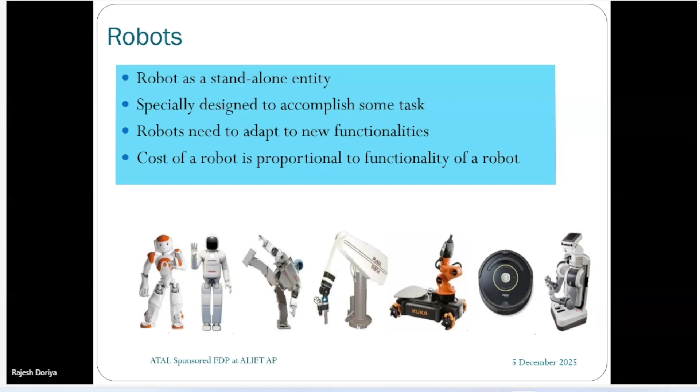If we trace the development of robots or robotics, we can see that it all started even before AI, and it has reported its development along the path of AI only. So the development reported in the field of robotics is very much similar. As we understand, whenever we talk about robotics, we are talking about AI only.

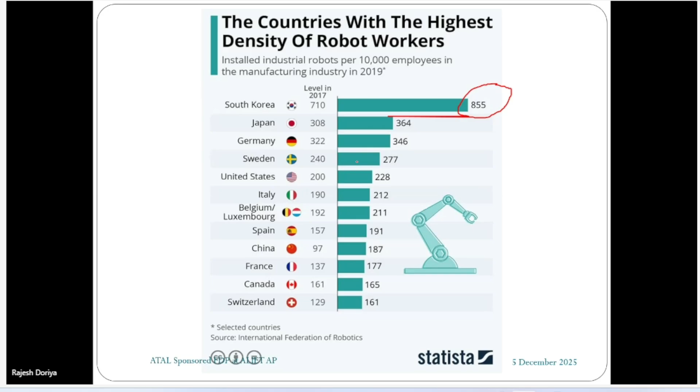Now, if we talk about the countries having the highest density of robot workers, in this graph we can see South Korea has the highest density of robot workers. Out of 10,000 employees, South Korea has around 855 robots. Japan is next, with 364 robots per 10,000 employees, followed by Germany, Sweden, US, and Italy. So that has been the trend in these countries.

Now, one more interesting study: how advanced robotics will impact the job market. This particular survey was done on a number of companies in a number of countries. As you can see in this plot, in China, around 67% of companies think that robotics are going to impact the job market.

5 to 10% of companies, this is the share where they are saying that around 20% of the job market will be impacted, and this is where they are saying more than 20% of the job market will be impacted. So in total, 67% of companies think they are going to get impacted by the introduction of robotics in the industry.

Here is India, where 41% of industry personnel think that with the rise of robotics, the job market is going to get affected. So by how much percent? This is the percentage: we can see around 10% and 11 to 20% have got an equal share, more or less.

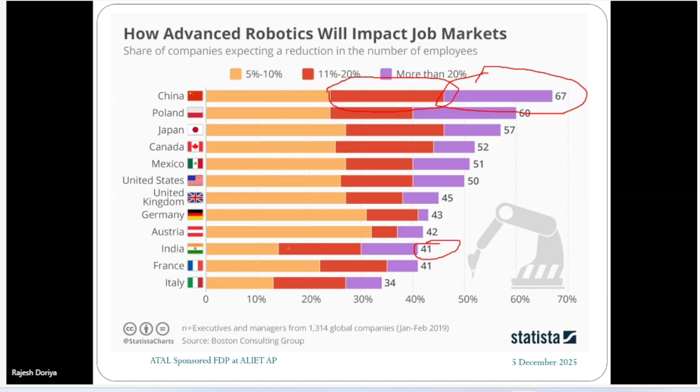Now, there are a few things whenever any development is done in the field of robotics. A robot must follow three laws: a robot may not injure a human being; a robot must obey orders; and a robot must protect its own existence when the first two are being followed. Whenever a robot is developed, these three laws of robotics must be followed. And these are the 4D environments in which robots are mostly used: dull environment, dangerous environment, dirty, and dear.

Dull means where some repeated task is being done, so with time it becomes dull. Dangerous, for example, in some nuclear facility, one has to operate certain things or do some jobs. So those things are going to be called dangerous jobs.

Dirty, for example, sewage cleaning and other things, so those are classified as dirty. Dear, where some sort of money is going to be made. These are the broad classifications of the environments in which robots are used, and these are the 4A tasks performed by robots: assistance, autonomous, automation, augmentation. With robot assistance is provided, then they're used for autonomous purposes, for example in space. Automation is done as we've seen in industrial cases. Augmentation, for example, where limb replacement is done—these are examples of augmentation where along with robots, people are doing their work.

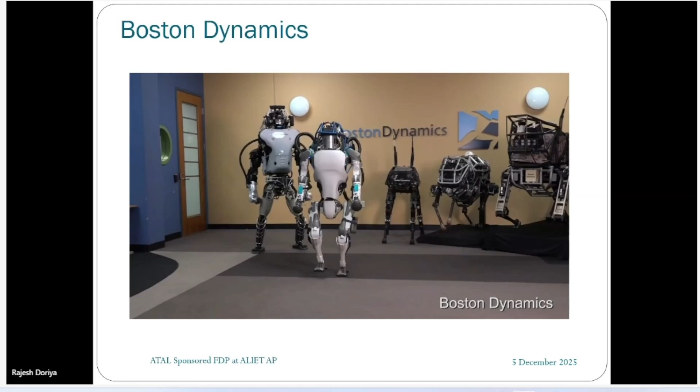Let me show you a video which will give you an idea of the developments being done in Boston Dynamics. Please let me know if you can hear the audio or see the video. Can you confirm audio and video are available, participants? Audio I could not hear, sir, but video is good. Now it's better.

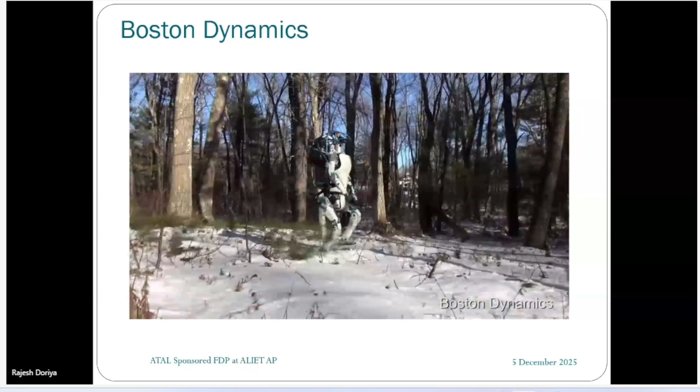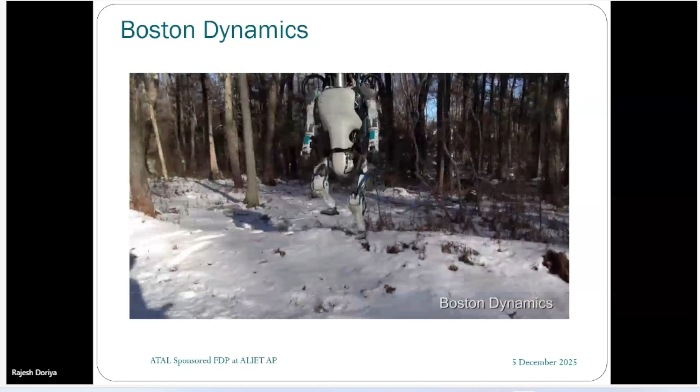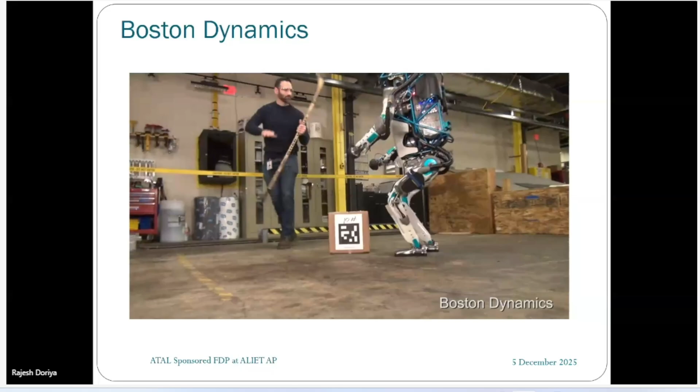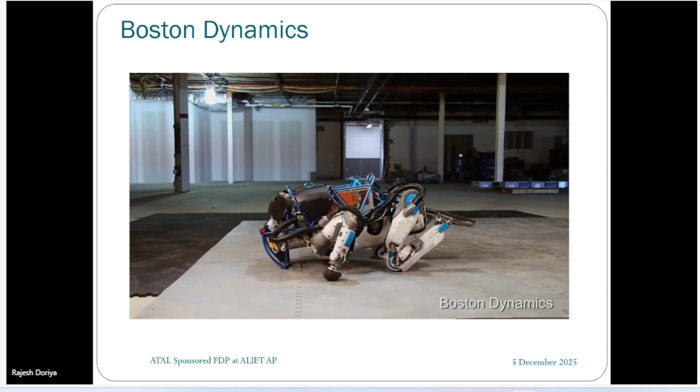So this is one development, and the other one is the nanobot. These are very tiny robots which swim in our bloodstream and do the designated job. They can have a micro camera and a payload, and with the help of this payload we can deliver a drug to a specific part in a controlled quantity, wherever it needs to be applied. So it can swim in our bloodstream, and there are many things which can be done. There are a variety of ways to power it—it can be with internal power sources or external power sources.

Now I guess I should play a video so that it gives you a better idea of how nanorobots are going to be used in the future.

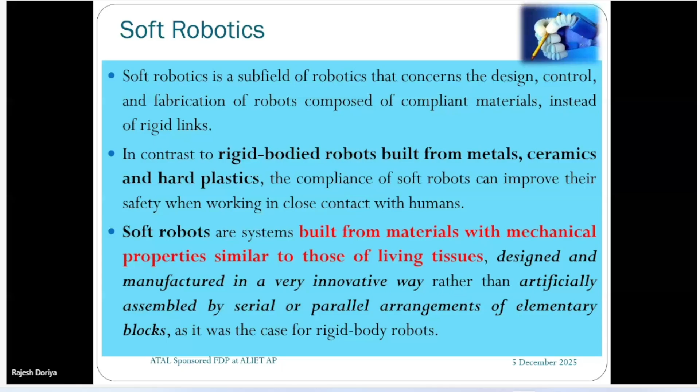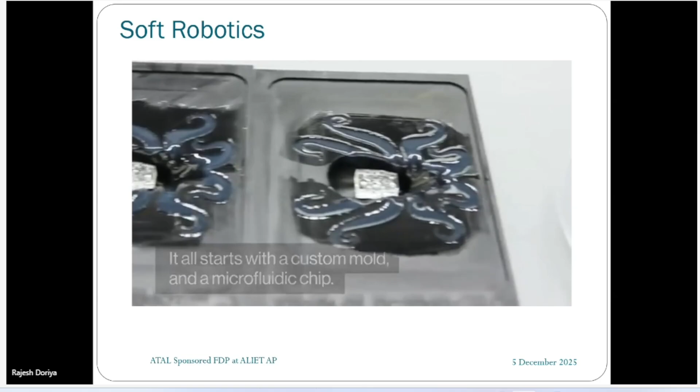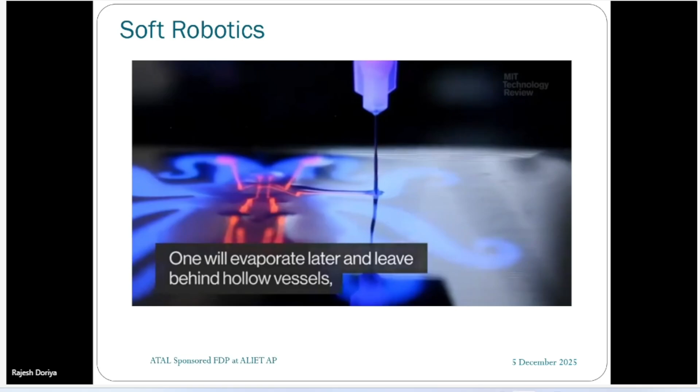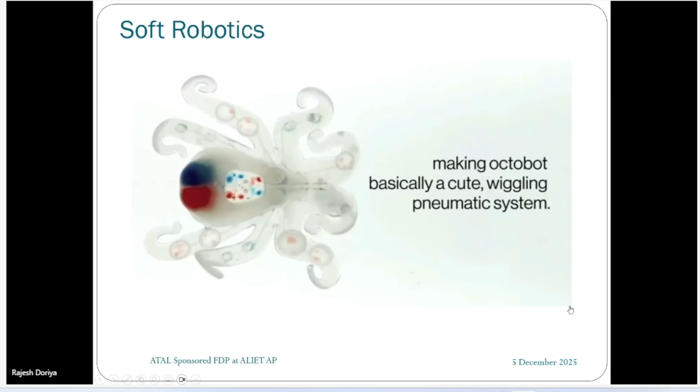So soft tentacles are going to be developed, and they are going to play a huge role in upcoming developments. In the field of soft robotics, the advancements are remarkable. We are not going to perceive robots the way we do nowadays — all those hard links and rigid parts are going to be gone.

So what happened when I went to Japan? I went to a number of shops, and whenever I went, a number of robots were greeting me. I did not need to go to a shopkeeper to ask about a product's specifications or its cost. Even if only a single shopkeeper is there and multiple customers are present, the shopkeeper won't be able to pay attention to all customers. So we tend to just move away from the shop because the shopkeeper is engaged with another customer and we're not able to find what we want. So to engage customers, these sorts of robots are there, and they are doing a great job.

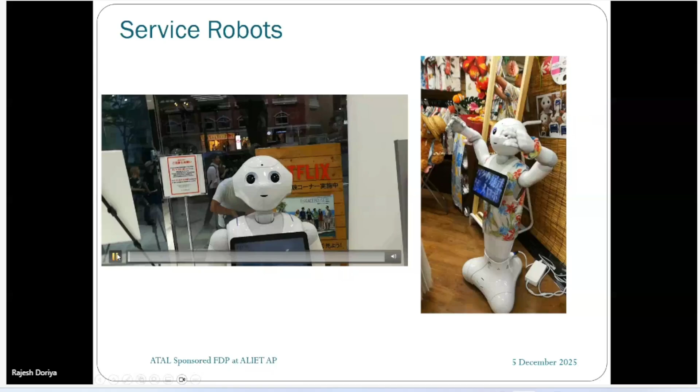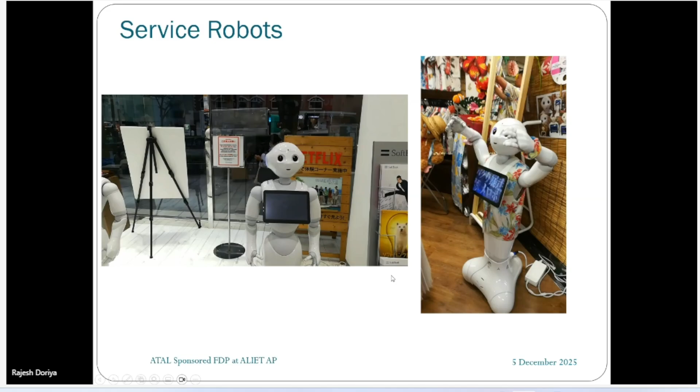Let me show you one such experience. In the shop, wherever I'm going, you can see these robots following me, trying to interact with me at the same time. So not even for a single moment did I have the impression that I wasn't being accompanied. This is another one where it is bringing in all the customers, letting the shop know what customers are present, and introducing everyone in the shop. This was a video taken eight years back.

Now I'm going to try to have an interaction with this robot. Just try to see the emotion and the gesture this particular robot is showcasing. Although this robot only understood Japanese, I tried my level best to interact with it in English — just observe the emotions and gestures shown by this robot.

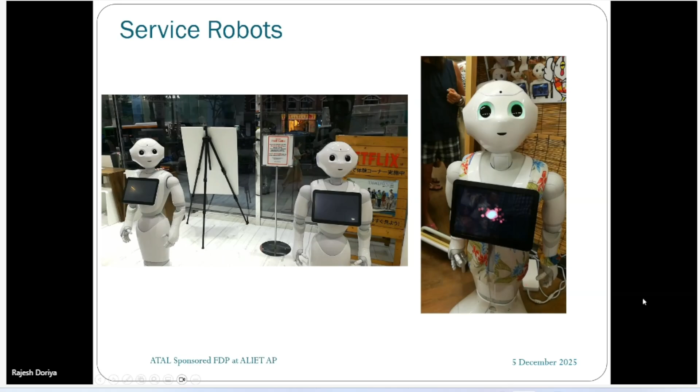It's getting quite awkward, you know. How? Then let it go. Arigato. Arigato. Arigato. You understand that? Arigato? Arigato.

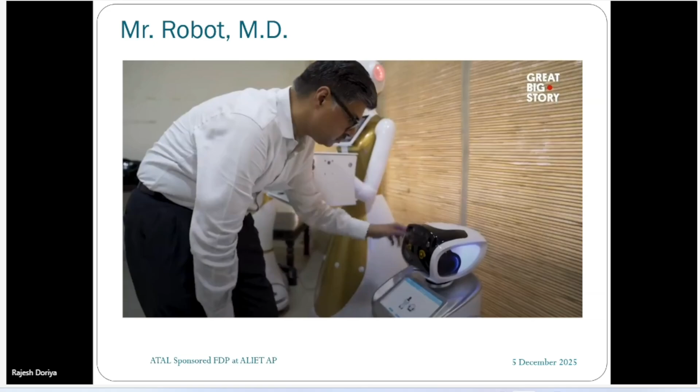There are various types of robots which can operate in a hospital. For the patient, it is like talking to a doctor face to face. I am Rajiv Karwal, chairman of Milagro Robots. Can I also introduce myself? Of course, Elf. Hello, I am Milagro Robot Elf. Nice to meet you and hope we can be friends. This great big story was made possible by Accenture.

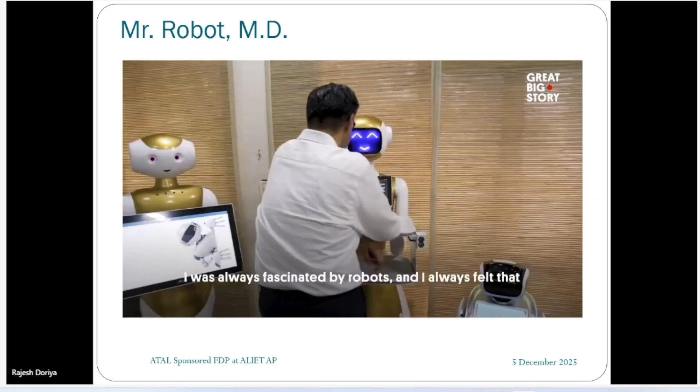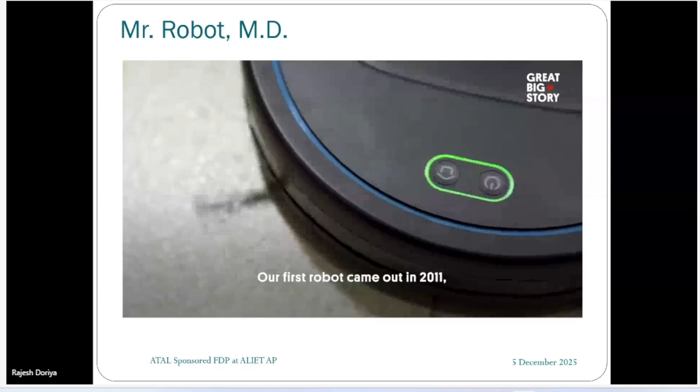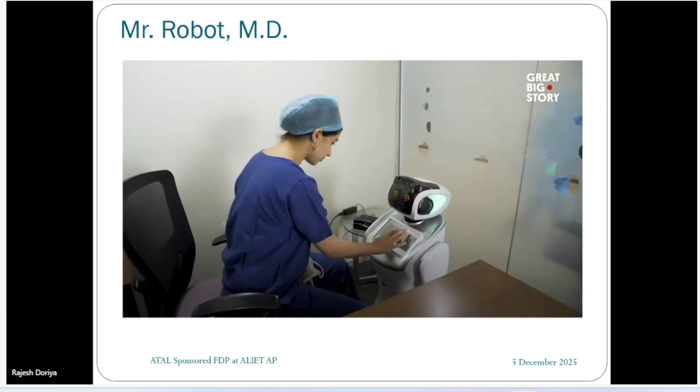I was always fascinated by robots, and I always felt that the next revolution amongst products would be in the robotic field. Our first robot came out in 2011, which was floor cleaning robots. Then we kept on adding many new categories of robots. The focus on the healthcare industry started when the coronavirus was spreading havoc around the globe. I was seeing a situation in Italy where almost 30% of the healthcare workers were getting affected. At that point in time, we thought we also have humanoids and they are probably acting as reception robots or concierge robots, but they can easily serve as a telepresence for the doctors.

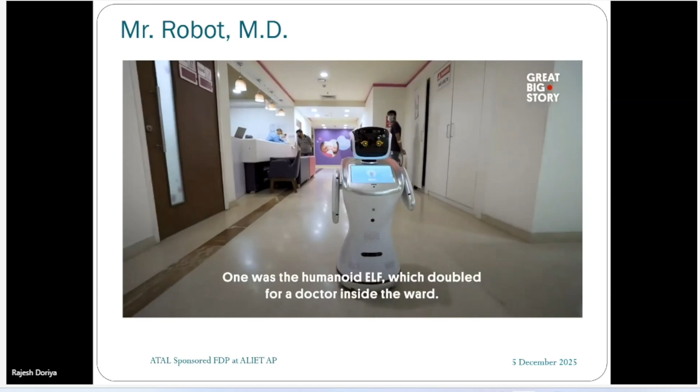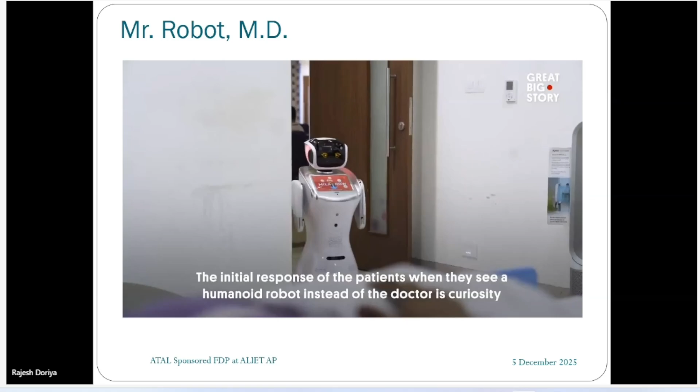We got a call from India's largest medical hospital and they said, can we do something together? We took our robots, took their feedback, and they selected two robots for their use. One was the humanoid Elf, which doubled for a doctor inside the ward, and also the floor cleaning robot, which killed the virus spores on the floor. The initial response of patients when they see a humanoid robot instead of the doctor is curiosity and maybe a little bit of doubt whether they would be satisfied.

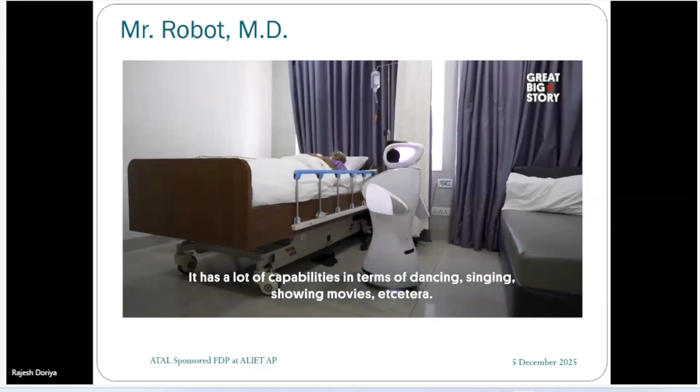And if there's anything, if you need any help or any questions, I'll be around, see you soon. Okay, thank you. The patient gets accustomed to it very, very quickly, and it's almost like face-to-face talking with a doctor. And also it is safe for the doctor, safe for the patient. Would you like me to dance? It has a lot of capabilities in terms of dancing, singing, showing movies, etc. So in that way, the patient remains connected, is in a good mood, and the robot keeps wandering around the ward.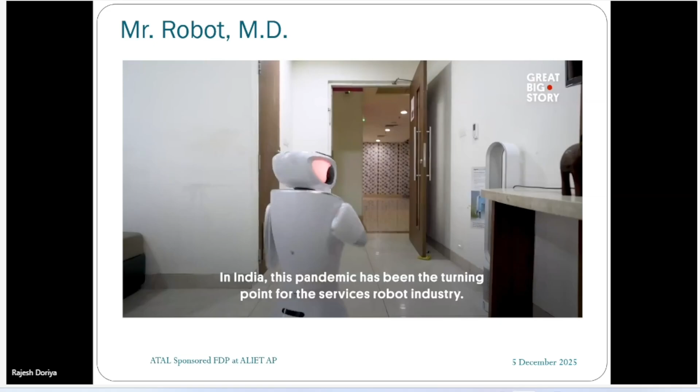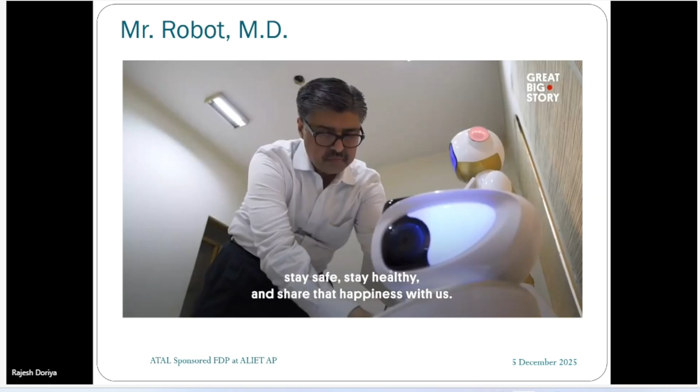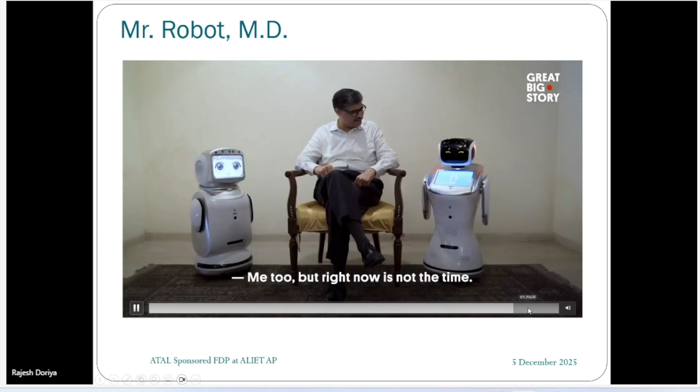I am your robo doctor. Take care, you will be well soon. Thank you. In India, this pandemic has been the turning point for the services robot industry. It really makes me happy when I see that our robots are helping people lead better lives, stay safe, stay healthy, and share that happiness with us. I don't have a favorite amongst my robots. They are all like my children, so it's very difficult. Am I not your favorite? Of course you are, of course. I love you. Me too, but right now is not the time. Would you like me to dance?

So I guess now you would have realized, and we have very strongly felt the need of this sort of solution or service robots in that Corona pandemic, right?

So thereafter, another major development which is being done in the field of robotics, or being reported in the field of robotics, is cloud robotics. So I would like to play this particular clip. This is a movie clip from the Matrix movie. I would like to ask all participants to watch this clip closely and let me know what exactly has been done in this clip.

Okay, so I request all participants to please pay attention and let me know what has just happened in this clip. Can any participant just tell me what exactly just happened in this clip? Any participant? Can you repeat? Yeah, please.

Please repeat the question. Okay, fine. A lot of noise is coming from the background.

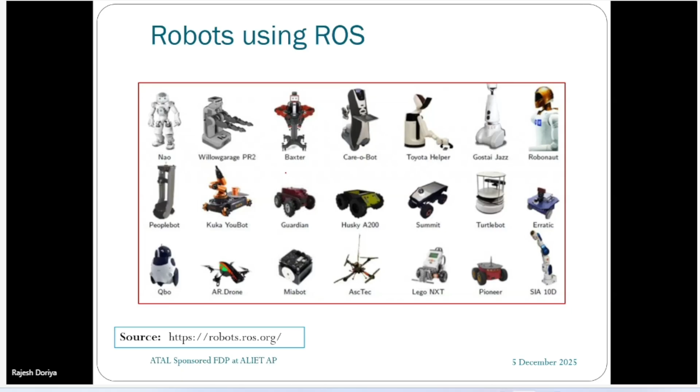Let me see whether videos are available, yes, one video is available. So you will get an idea about the capabilities which ROS offers. Let me play this one.

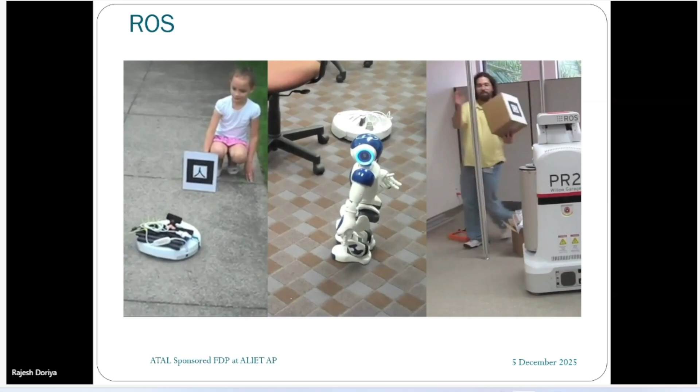So now I guess you would have got the idea about the capabilities ROS offers.

Now, apart from that, if you just try to work on ROS, you are going to get the opportunity to work upon ROS 2. This is the recent development which they have introduced, and in this development they have embedded the capability of data distribution service with that. With the introduction of this data distribution service, the additional things we are going to get in ROS is automatic discovery of the essential services or functionalities which are going to be there. It is also going to ensure the quality of services, for example it must be reliable.

It must be reliable, secured, and there are many more features which are going to be showcased in the upcoming slides. Apart from that, it is also going to provide better performance. So these are the functionalities which ROS 2 is going to provide.

For example, true cross platform support, so you can run ROS on Linux, Windows, or Mac. It is also going to provide security, in the form of authentication, authorization, and encryption, and you can also use it in real-time applications. Then there is a variety of tools that you are also going to get with this.

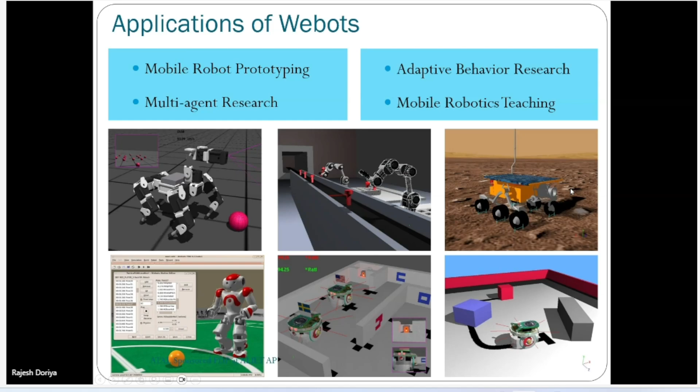Let me play a video so you can get an idea of the capabilities Webots offers. The only limitation initially is that, now that it has become open source, you can install it and work with it, but in order to get support, you need to pay for it. So that's what's going to be there with Webots. Let me play this video.

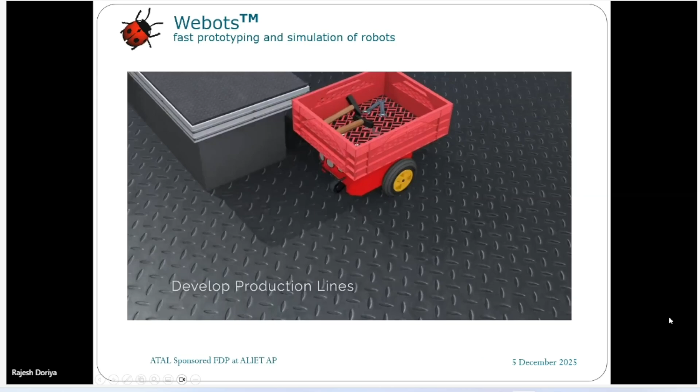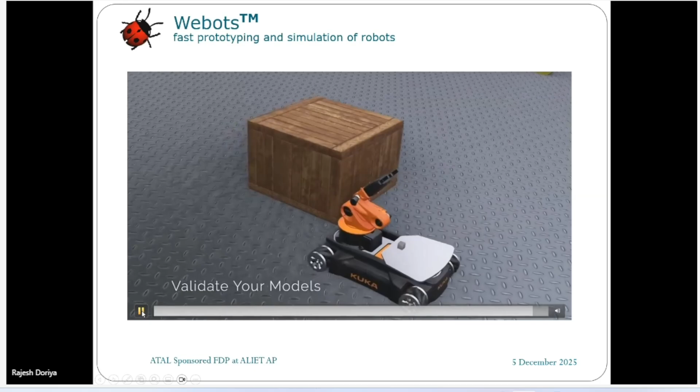So we have also done a certain amount of work in this direction. We have developed a framework where we've created a number of robotic services, and made those services available to robots for which that robot was not initially designed. One such service in that category is navigation, where the robot was having some difficulty in navigation.

So the robot just sends the data and gets the direction from the cloud on where to move and how to move. This is one service we've developed, and thereafter one more service we've developed is how to create a map, which is a very computationally intensive affair.

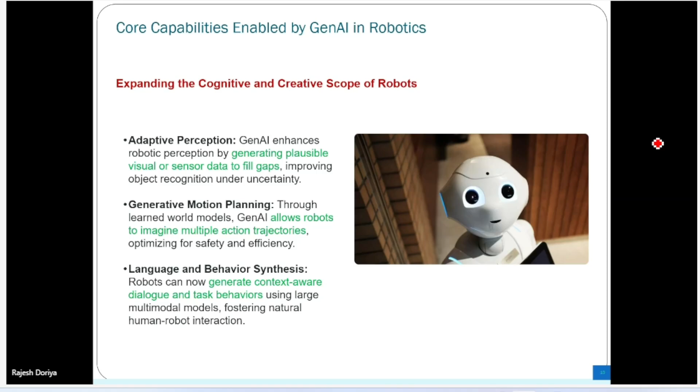Then it is going to have language and behavior synthesis. So with this, it can generate context-aware dialogues and task behavior. And in the automation industry, it can also generate various designs, and even the design optimization it can report. So with this, the cost effectivity and other design aspects can be introduced.

And apart from that, we can also have simulation to reality transfer, where it is going to bridge the gap between the virtual training and the real world deployment. Because we know whenever the things are being done in the simulation, that may not exactly replicate the real one. So how to improve that cycle? It can only be improved when it is being trained in a variety of scenarios. So how to create those variety of scenarios? Of course, this is where we can make use of Gen AI.

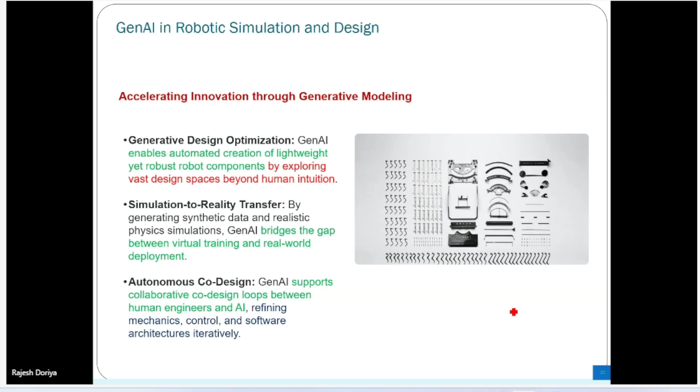Then autonomous co-design, where the Gen AI capabilities can work along with the humans. This is being called the autonomous co-design process.

Then trajectory generation and reinforcement guided generation, zero shot motion transfer. Zero shot means a robot can generalize the control policy for unseen tasks or terrains or scenarios. So it is very much possible a robot may encounter a situation for which it was not programmed for or it was not expecting, right? So how to deal with that? Of course, to have that, this Gen AI can help.

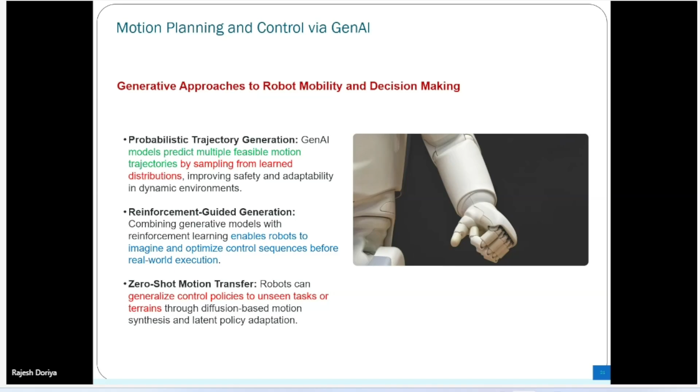Then natural language grounding, where it is going to enable robots to understand and execute verbal commands, because the moment we are moving towards embodied AI, we want our robot to be developed with all the capabilities like us. So similarly, it is going to have the capabilities so that it can have a conversation or verbal communication the way we do with other people.

And then it will also have contextual reasoning, where it can interpret spatial, emotional, and other task context. What is the context and what is the scenario in which the things are being done, right? For example, in some context, someone might say 'I'll kill you' as a joke. But one has to understand in what sense it is being said, right? So all those things can be provided to robots, or in the field of robotics, you can say.

Adaptive dialogue systems: with time, with scene, with scenarios, how a robot can maintain memory, personality, and adaptive responses so that better interaction can be done. You can witness this well — if you carry out certain work in ChatGPT and do the conversation in the same chat window, it will start giving you responses relative to the history. So this is what is being done by that model, and the same thing can be done when this particular capability is visualized in the form of embodied AI or embodied AGI.

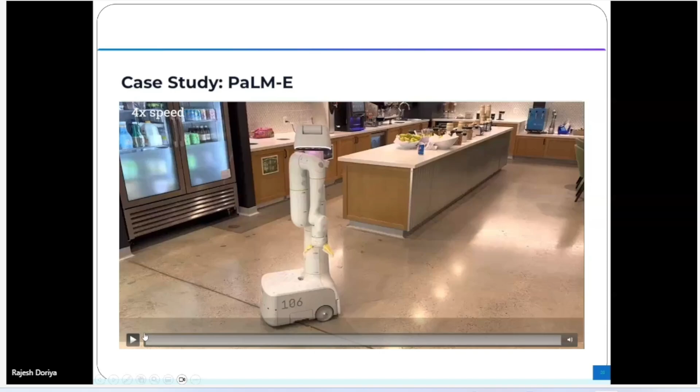Over here, generative AI is used to create a set of sequences, or actions rather.

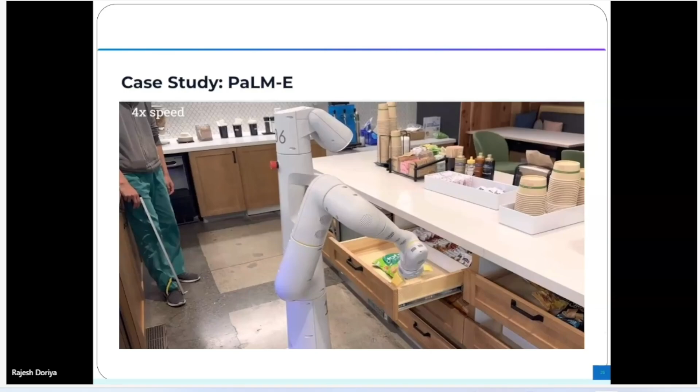And remember, this particular robot was not trained for this. So all these things are being done with the help of this generative AI, and these are adversarial disturbances which are being created.

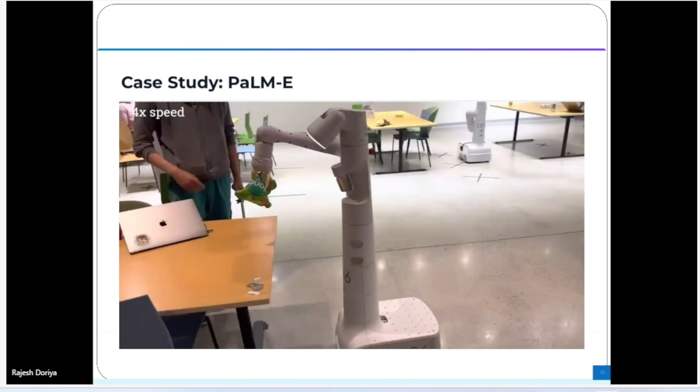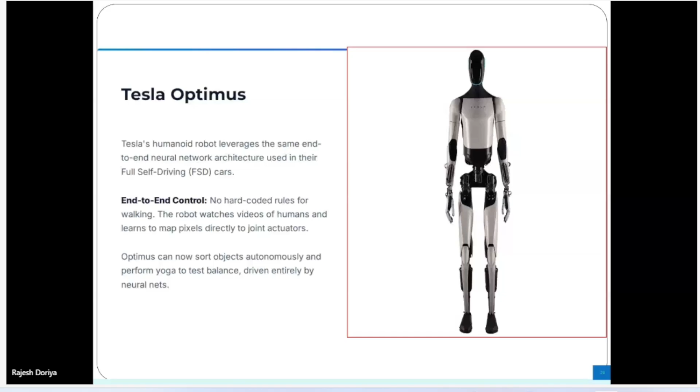Now, some developments such as Tesla, where end-to-end control is also being provided, where it can sort a number of objects and it can do a number of things - for example, yoga and stability tests and all those things. So it also adopts the Gen AI capabilities.

Then the power of simulation, where you can even generate whole scenarios and observe how things are done in that scenario. For example, you can say, okay, a messy kitchen is there - now you just need to correct it.

Now there can be a variety of possibilities of having a messy kitchen. So maybe in one case only the glasses are there on the floor; in another case, along with glasses, the vegetables are also there on the floor.

A lot of dust is there, so a huge variety of possibilities are there. Each of these possibilities can be generated, and then you can see whether your robot is able to clean that messy kitchen or not. You've provided the capability, now you just want to test it. It is not possible to create every type of messy kitchen scenario, so this is where these things can be done. NVIDIA Isaac Sim is one such toolkit where one can do that.

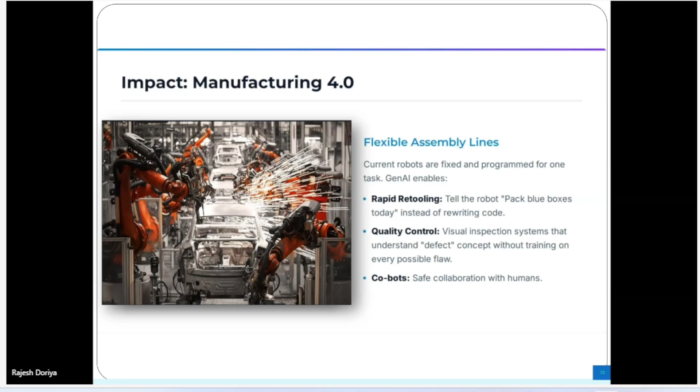What is its impact on Manufacturing 4.0? Of course, rapid retooling, quality control, and cobots can be there, which we already discussed. Then it is also going to impact logistics and warehousing, handling unique items and stock keeping units. With the help of generative AI, routes can be optimized and a variety of items can be handled effectively at runtime, and autonomous bots can be coordinated efficiently.

Then it is also going to mark its impact on healthcare, helping in surgical activities, care robots, and lab automation. For example, in the surgical aspect, it can identify given a scenario how much force a doctor or robot should apply, how much blood is coming, what is the texture of the skin, and handle other delicacies. All this can be analyzed with the vast amount of data from which a model has trained, and then action can be taken accordingly, and people are doing it.